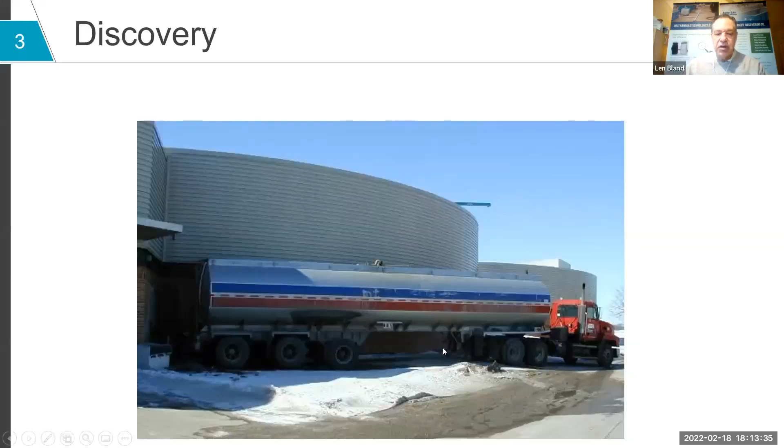Then when we got a hold of it, we started making a list of all the different markets that we could impact with the technology, and we got so excited. Because we discovered that it could be a platform technology. And by platform, we mean same technology working across multiple markets, whether it's wastewater, oil and gas and the wastewater coming from that, cleaning water to grow plants or fish or animals, or even cleaning water to better clean up healthcare so that you can kill dangerous viruses and bacteria.

What makes nanobubbles special, and now I bet you've all become somewhat familiar with them, are a few things. So the size of the bubble makes a difference. Nanobubbles are generally less than 375 nanometers in size. There's a lot of pretenders out there saying, oh, we make microbubbles or micro nanobubbles. Microbubbles are generally greater than 375 nanometers. And here's some of the differences. So microbubbles vary in size.

That size difference in the bigger bubbles gives them a rise rate, whereas nanobubbles don't have a rise rate. The surface tension of the liquid is greater than the buoyancy of the bubble, so they don't rise like normal bubbles. And that's really the key for wastewater treatment. But when you have bubbles that vary in size, that means they're rising. One question you could ask to find out if you have true nanobubbles is, how fast are the bubbles rising? And if they say anything but the bubbles don't rise, you know you're really talking about microbubbles.

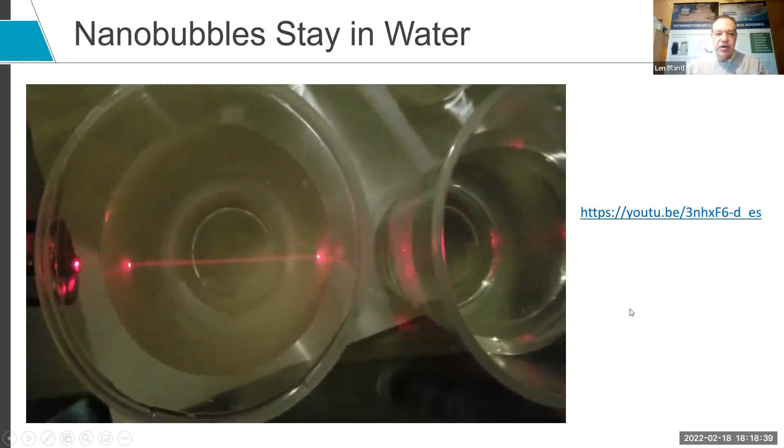So this is actually bouncing off clouds of nanobubbles that are throughout the column. And throughout the column is really key because they're not rising, so they're usable by bacteria and other things in the water. Now, there are a number of ways that nanobubbles are being made today, and those include membranes as a very popular way, and they work great if you want to make nanobubbles.

Oh, yeah, a question?

Okay. Please carry on. They work great if you have a clean source of water. So the challenge is if there's any possibility that there could be a buildup over time, the membranes clog up and they become difficult to maintain. So if we're treating wastewater, it's a challenge because we don't want to use a freshwater source to clean up our wastewater. We want to use that same wastewater source. So we want something that doesn't clog up.

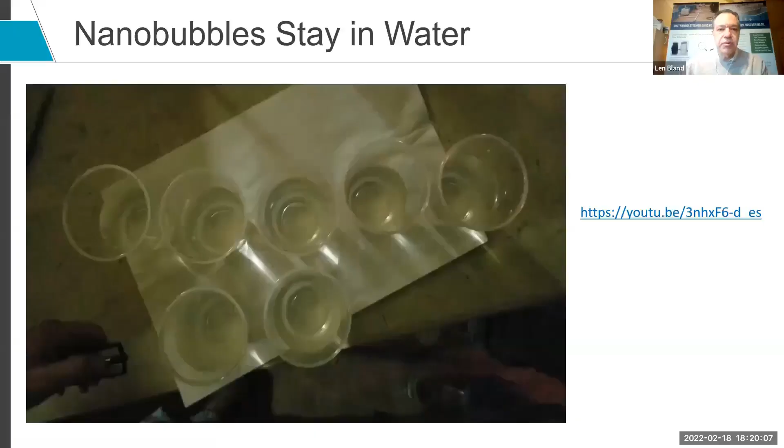There's also, in creating nanobubbles, some challenges in scalability, because everybody touts this great information about how many nanobubbles they have per liter. They might be 10 to the 8th bubbles per milliliter. But it turns out that many of the tools out there only get there by recirculating through their system 5 times. So when you ask how much water their system treats and they have a quote, you may have to divide that by 5 if you want a full concentration of nanobubbles. So it makes it difficult to scale for large bodies of water.

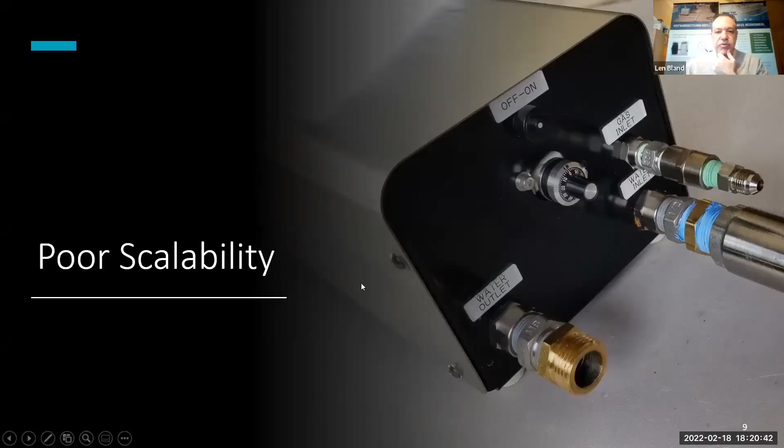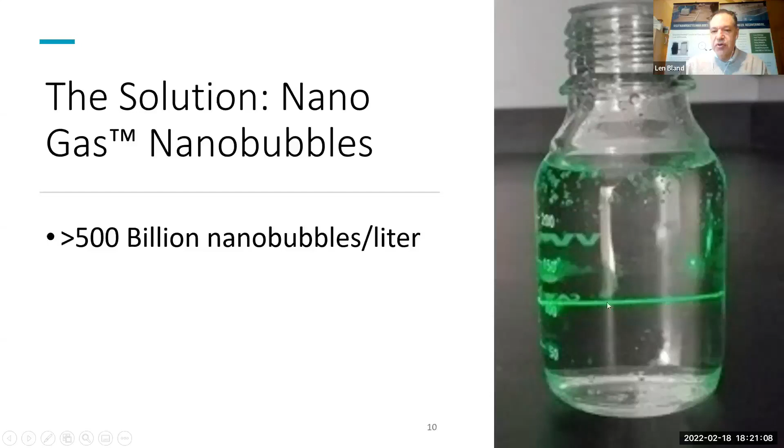What we do is we create Nano Gas nanobubbles in solution. And we've measured over 500 billion nanobubbles per liter, essentially 5 times 10 to the 8 per milliliter. And you can see a clear set of water. You can see how this green laser light is showing there's clouds of nanobubbles in there.

Now, if you're using it for wastewater treatment, one of the ways to use it that's fantastic is getting high levels of dissolved oxygen in solution. If we think about dissolved oxygen, you might be familiar with Henry's law, which says that for a given temperature and pressure, you can only measure so much dissolved oxygen in a fluid. And so some DO sensors only go up to 20, because tap water might be only 0 to maybe 14 at the most.

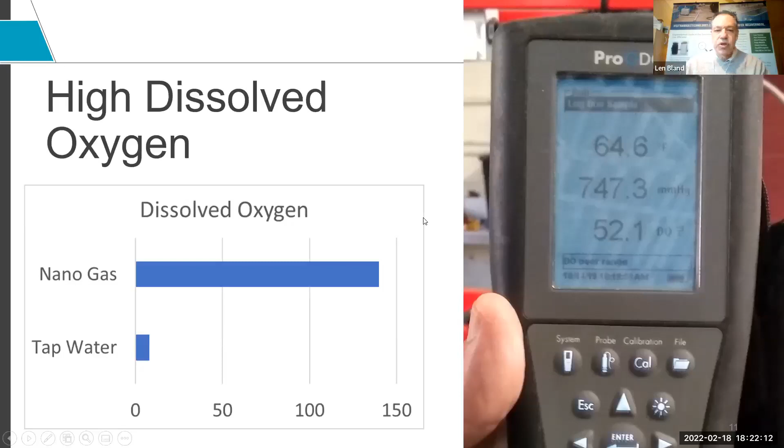With our Nano Gas bubbles, we'd measure dissolved oxygen levels up to 140 parts per million. And here we're showing a YSI device at 64 degrees, normal temperature, normal atmospheric pressure, and we're measuring 52 parts per million of dissolved oxygen. So what can you do with that? We'll talk about that in a minute.

One of the other things that we get with our nanobubbles is it becomes scalable. So rather than saying you need to run it through our system 5 times, we can put, let's say, 5 gallons of nanobubble water into 45 gallons of regular tap water or source water, and we end up with 50 gallons. And here we're showing those 50 gallons have 38 parts per million of dissolved oxygen. So we multiplied the water that we're treating 9 times. We just take a side stream. And so that means we can start treating large bodies of water.

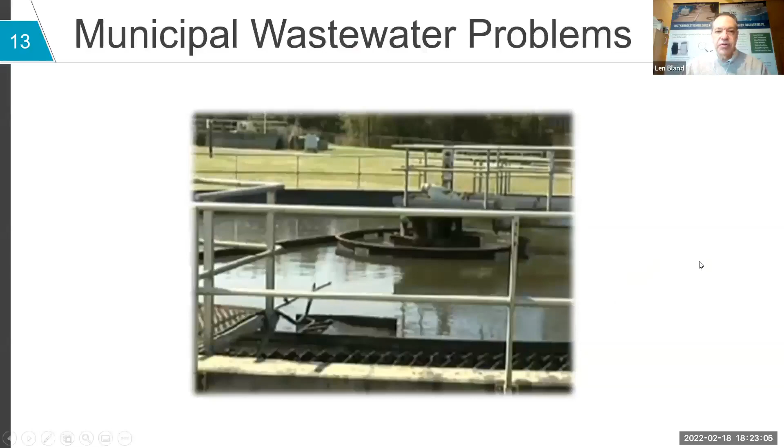So let's look at some of those. Now, in municipal wastewater, I know that last session Dave talked about ponds that are covered with harmful algal blooms. One of the common low-cost ways to treat water that villages and municipalities use is a pond, where they let the water sit with the air flowing over it and anaerobic bacteria in the bottom treat that pond.

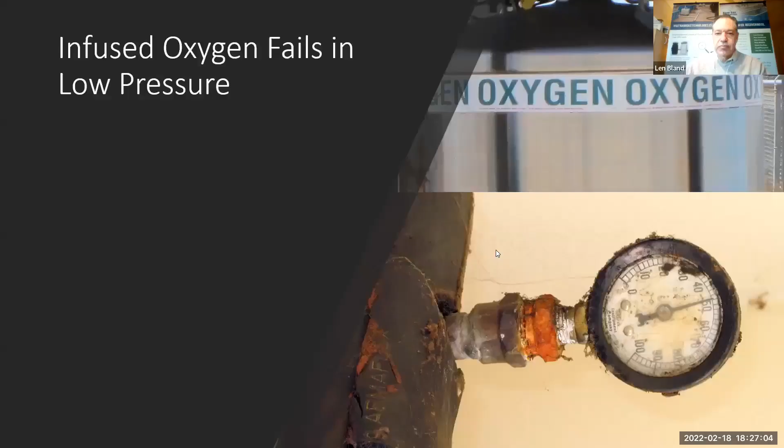So what we're talking about with nanobubbles is the real difference. If you think about it, there's about 21% oxygen in the air. With a nanobubble, you might have as much as 95% oxygen transfer efficiency. With fine bubbles, the best you might see is 30%. And so when you look at oxygen transfer, if you're using air, you might be able to get 20% oxygen transfer versus just 6.3% with a fine bubbler.

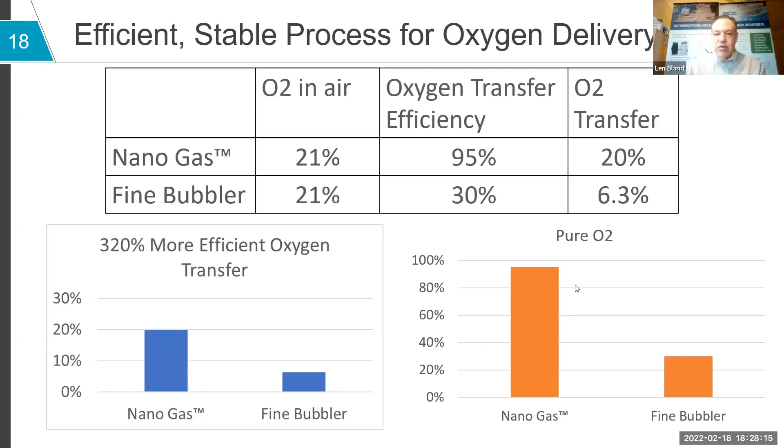So in other words, if you're using air, you're not going to get a lot of oxygen transfer. You're going to use a lot of energy to get there. And so we could be as much as 320% more efficient, and pure oxygen could get you close to 90, 95% oxygen transfer efficiency. So only 5 or 10% of the energy put in is wasted with oxygen that might come out.

It's like going to a doctor and you walk in and they say, oh, I know exactly what's wrong. Here's some medicine. This will solve your problem. Thank you very much. And you go, wait a second. I didn't even tell you what was wrong with me. How do I know this is going to work? So it's true for wastewater too. We need to diagnose the problem in order to have the right solution.

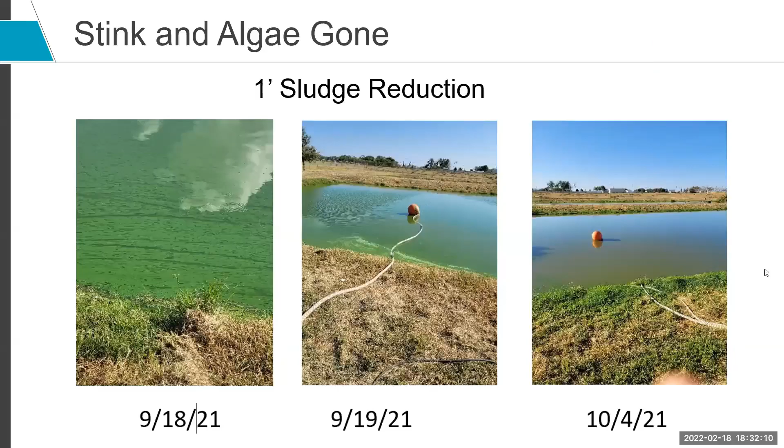Another area, we talked about the sewage collection systems and the stink you have associated with wastewater sometimes. You get iron sulfide and hydrogen sulfide. We're doing some work in the oil industry where we see this kind of buildup. And the oil industry pumps water out of the ground. In the US, they pump 7 times more water than they pump oil out of the ground. And so they have to get rid of it.

So that's working differently than the biological treatment you want for a pond. You're getting a chemical redox reaction with that oxygen. And it happens quickly because you have very small bubbles with much more surface area that are able to react more quickly on a chemical basis. So we take out chemical oxygen demand you see sometimes in industrial wastewater, as well as redox reactions like you do with hydrogen sulfide.

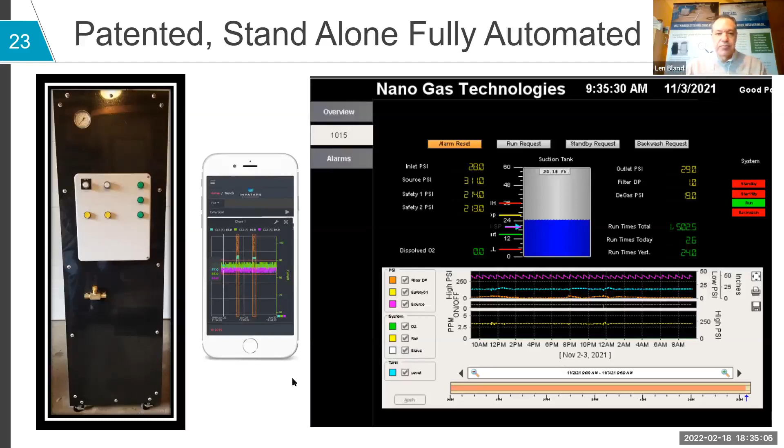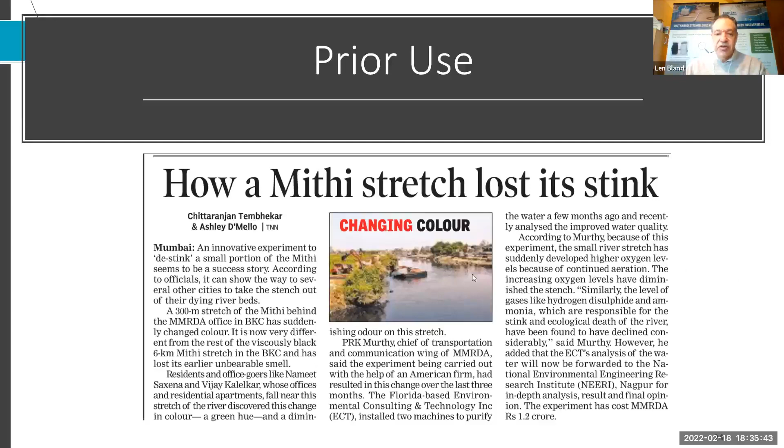During the development of the technology, it was tried out on the Mithi River through Mumbai. And that is exactly the kind of problem we were describing, with this incredible stink flowing through the city. At least it was at that point in time, and maybe that's been solved by now. But the developmental versions of the technology were taken to Mumbai, applied to the river. The stink went away, and the fish started jumping where the solution was applied.

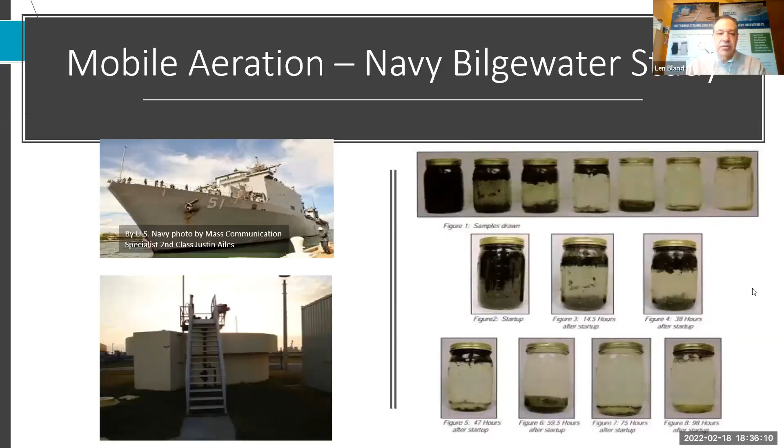It was also tested by the US Navy on naval bilge water, and we can see what that looks like. And the organic process took that bilge water from dark to clear, again, consuming all the organic material, including the hydrocarbons, including the oils and greases.

This process is patented. We've got 18 granted patents and 30 pending, plus trade secrets. So we think that by applying solutions like this with nanobubbles, you can solve global water and food needs.

And I'm open to questions, and I see there's some comments in the chat.